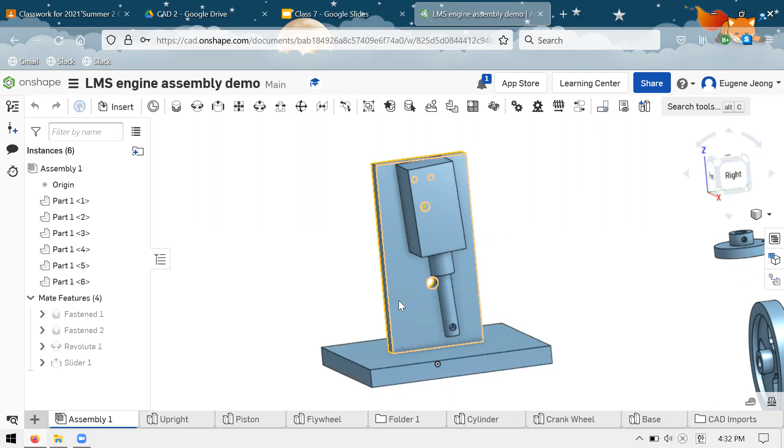What you hopefully have from last week is all 6 of these parts inserted into your assembly, and then the first 4 mates. So we fastened the base plate to the assembly origin, we fastened the upright to the base plate, we created a revolute between the cylinder and the upright, and we created a slider between this piston and the cylinder.

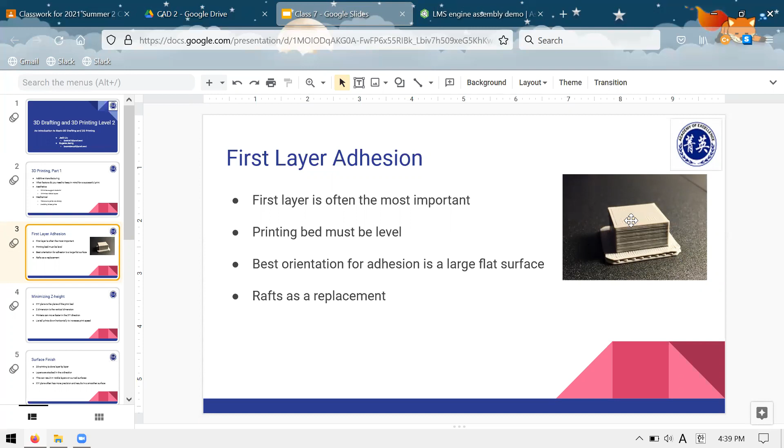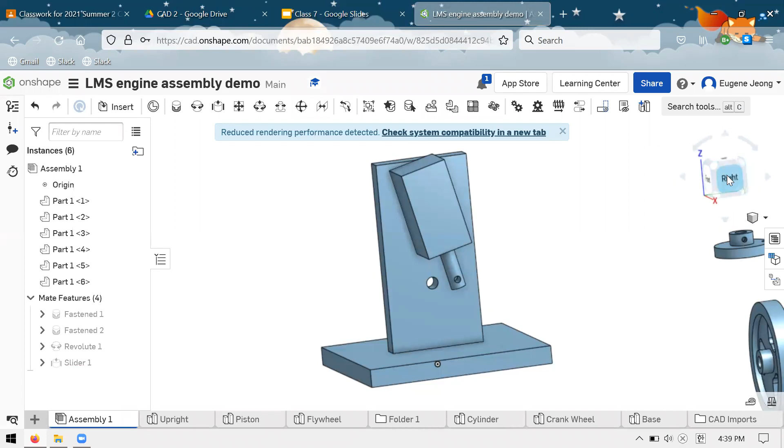Next, we have minimizing the total height of your build. When we have our coordinate system, just like in Onshape, whenever we describe a three-dimensional space, we talk about left, right, and top. So in Cartesian coordinates, that's the X, Y, and Z.

In general, not just for 3D printers but for most machines, we refer to the Z direction as up and down. A milling machine that's vertical, the Z direction would also be up and down. Although some machines have a spindle that lays horizontal, and in that case the Z axis can also be a horizontal one. But for 3D printing, usually we refer to Z as up and down, and X and Y create the horizontal plane. Usually X is left and right, Y is in and out, and Z is up and down.

It's important to minimize this Z height because printers move faster in X and Y than they do in Z. That means that if you orient your part so that a lot of the movement the printer has to do is in X and Y, then the print will finish faster, which is usually good. So you don't always have to put your part in the same orientation it will be used in. You often want to change the orientation just so that it prints faster and stronger, which is something we'll talk about.

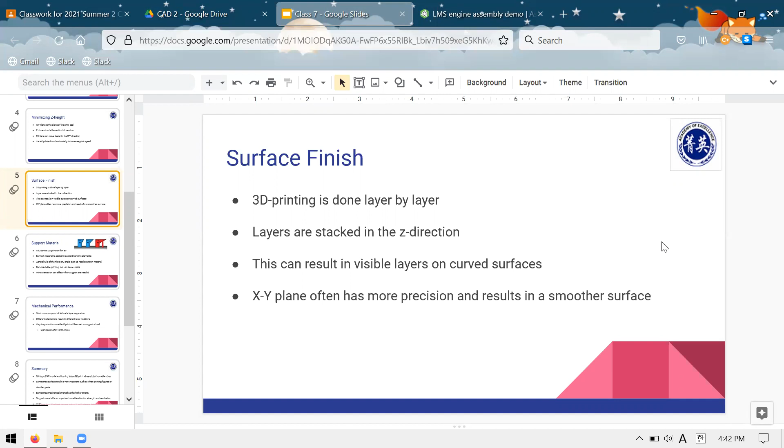Next, we have a discussion on support material. As you might imagine, if we're printing layer by layer, and you're trying to print a layer with nothing underneath it, theoretically you can't do that because there's nothing for that freshly extruded material to lie on top of. You need to have something underneath, and that's what we call support material. So when you're printing something, you might have to print parts or geometry that's not part of your actual desired final part.

And like I said before, if you have the support material, one downside is that once you remove it, you're going to have some kind of mark where it used to be connected to the part.

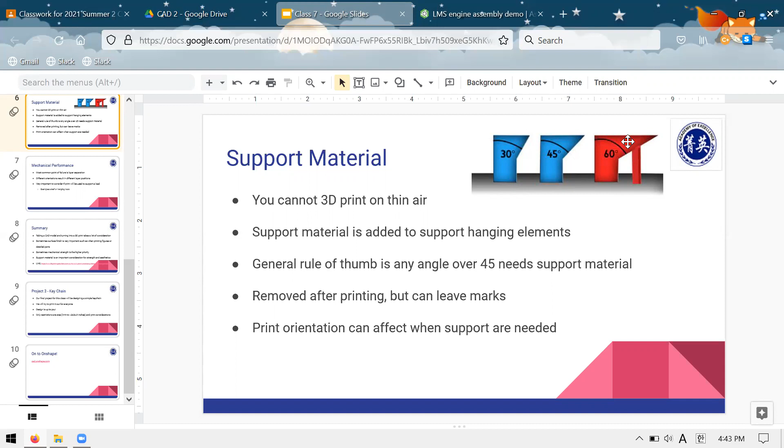Then there's mechanical performance. This refers to the effective material strength of the part you created. A lot of the time, for hobby purposes, it's going to be fine, but if you're designing a part for a more complex system, maybe for a robot team, a lot of your parts need some structural integrity—they need to withstand certain loads. So you need to consider that when you make your print.

One common type of failure is layer separation. When you have a 3D printed part, the layers all lie on top of each other. What's holding them together, if you apply a shearing force—take the top and push it sideways—is the adhesion between the layers, rather than a solid piece of isotropic, perfect material. So that's something to consider.

Again, different orientations are important. For example, if you're creating something like a long rod that needs to support something in tension—say you're going to hang a weight off a 3D printed rod—you should print such that the layers run the long way in X and Y, rather than printing a large number of circles on top of each other. This is because when you're pulling things apart, you want to be pulling these long extruded pieces of plastic rather than pulling apart the layers from each other.

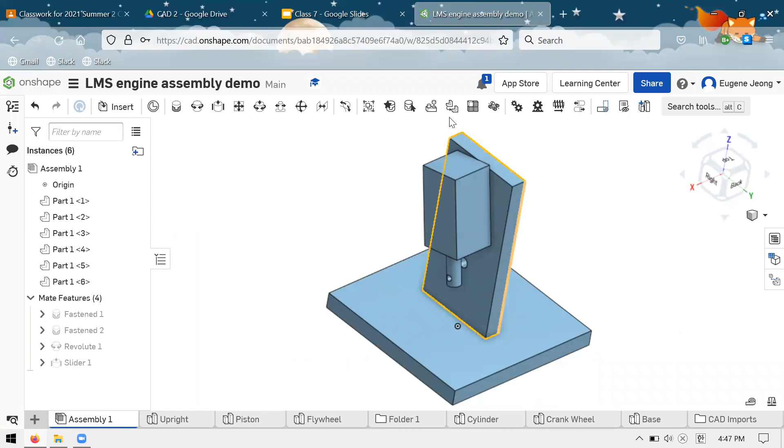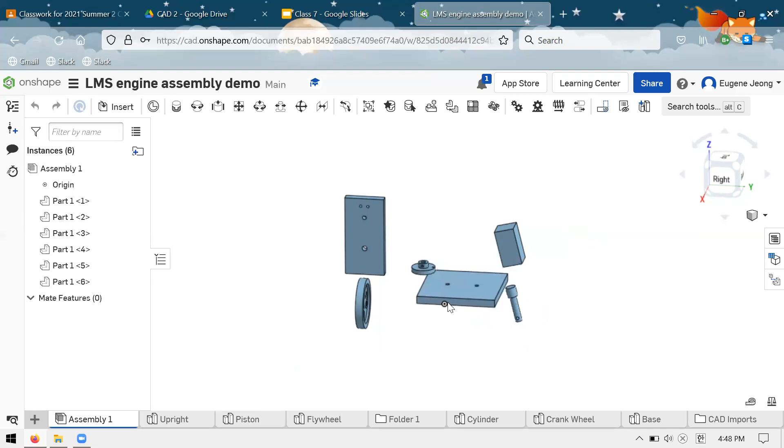As a reminder—I didn't do this, can you send me a copy? Because I didn't really do this one. It's not much, we haven't done that much yet, just make sure you've downloaded all of these from Google Classroom and you should be fine. No, I forgot, I wasn't here, can you show me again? Well, you were here last week and that's when we downloaded all the parts, so I can walk you through the mates again, that's totally fine. As long as you have the parts in your assembly, we're good. Okay, I'm gonna go there and download the file. Can you show me everything? Because I didn't do most of the parts yet. Right, like I said, even if you haven't done the parts, they're all posted on Google Classroom. Can you show me after class maybe? Because I can't get to Google Classroom for some reason.

No, I can't log in because of my school account. Can you show me after class maybe? I don't think I can help you with the Google Classroom part. No, I mean, can you show me how to make it after class?

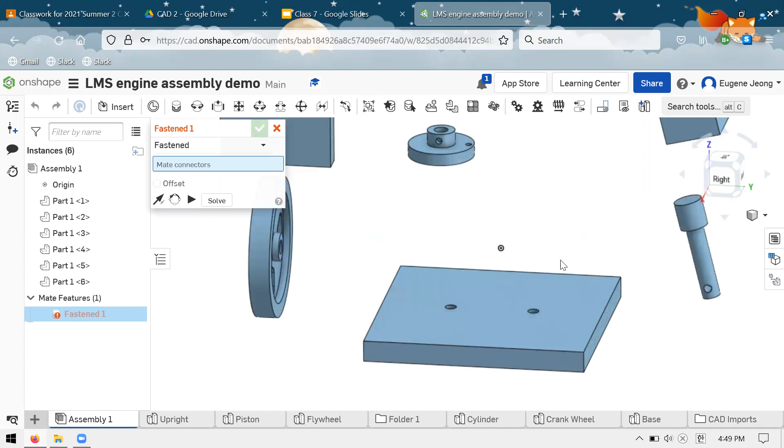For the time being, I will go over the assembly up to now, just so that all of that exists in one place, in one class. The progress hasn't been that much so far. We started with a fasten mate to position our parts with respect to the coordinate systems of the assembly itself.

Since most of you probably have seen this, I'll go through it quickly, but if you have a question, you can stop me and ask.

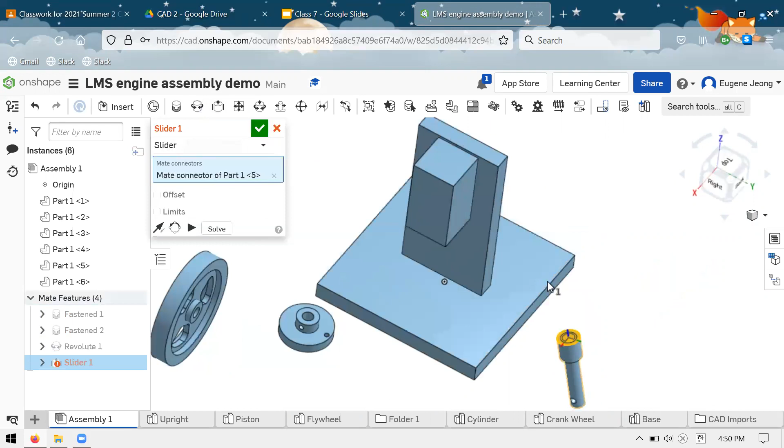All right, so this is where we were. I don't think anyone asked me any questions, so I'll assume that you're fine up to here. From here, we just have 2 parts remaining, and we will have finished this assembly.

And again, for this project, we have a reference of what this thing should look like on the original website. This is kind of what the final product is going to appear as.

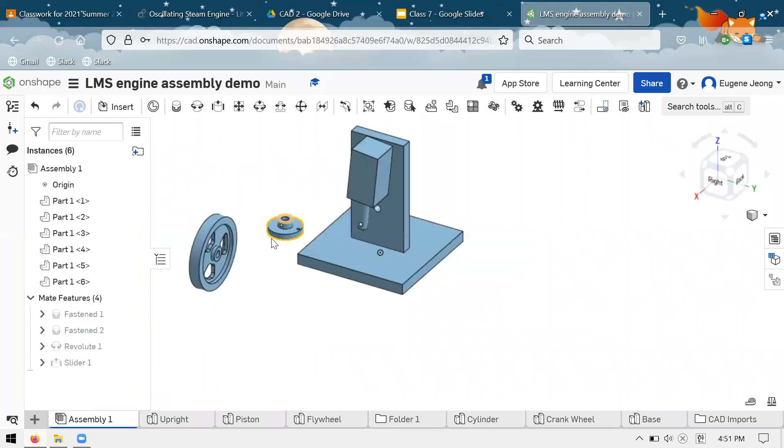So next thing I'll do is the crank wheel, that's this one right here. It attaches to the piston as well as the upright. You can see that in the final crank wheel, we have this hole here, and it will end up aligning with this hole here.

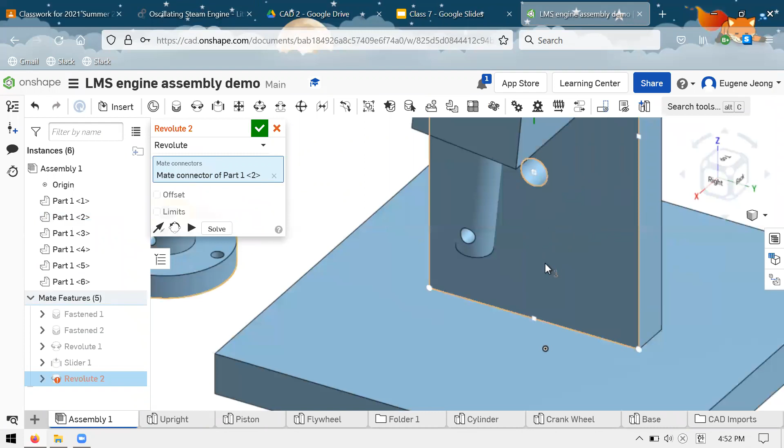So again, here we apply our revolute mate. The first step that I'll take is to put the crank wheel up against the upright so that it can spin freely there. But you'll notice that it's not yet connected to the rest of what's happening here. So first step, just make a revolute mate for this.

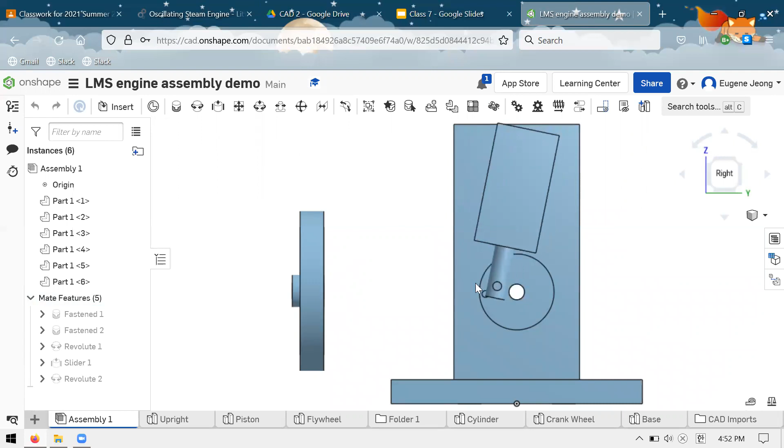And then the next step is where things might get a bit tricky, because you're going to be interfacing 2 parts like this. So we'll try it. And here there's a bit of a question about which mate that we might try to use.

When you think about what kind of behavior you want this to have, if you think about how this assembly will work with these 2 things moving together and following each other, they will actually rotate with respect to each other. So we know we probably want something like a revolute mate or a cylindrical mate.

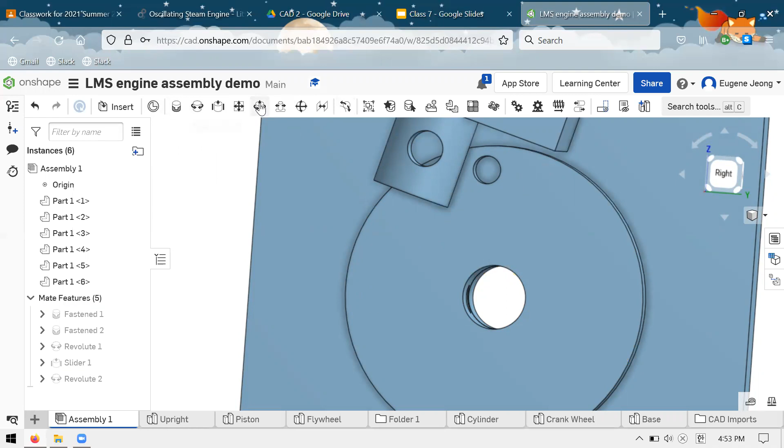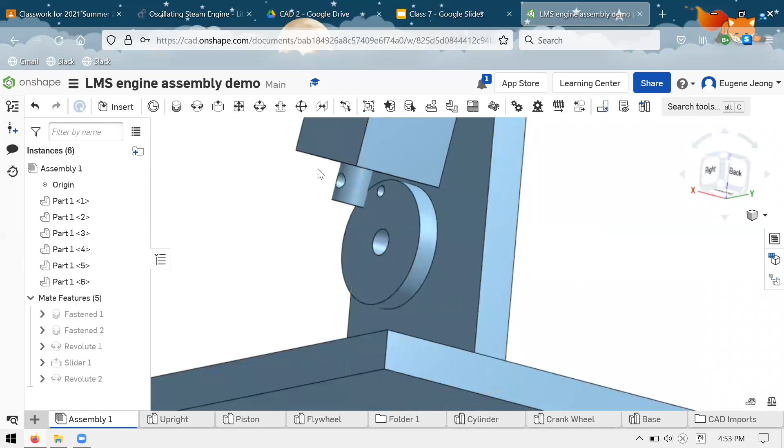In this case, I think we'll choose a cylindrical mate just because we don't know the exact distance between some part of this hole. So probably where the mate connector would end up is probably maybe the center of this hole and some part of this hole. And we don't know the actual distances there. So I'll start out by attempting with the cylindrical mate, and we'll see if that works.

Create our mate connectors, just click on the cylindrical bores. Doesn't matter too much which ones you use. Since they're cylindrical, this one, remember, has the freedom to rotate with respect to each other as well as to move axially. Hopefully, if I just solve this and accept it, then they're mated together.

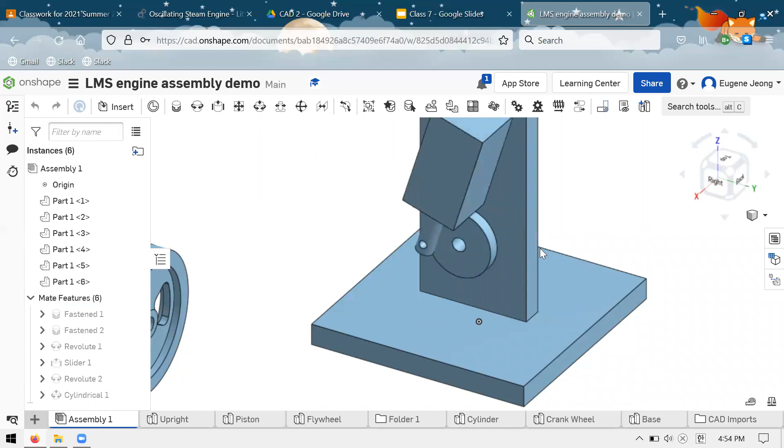And what we'll have here is, now you can see that the piston will follow the crank wheel, and we have kind of a reciprocating motion of the piston while the crank wheel is rotating. Likewise, the cylinder is rocking back and forth. So that's a bit of a tricky thing to do, but hopefully if you're careful,

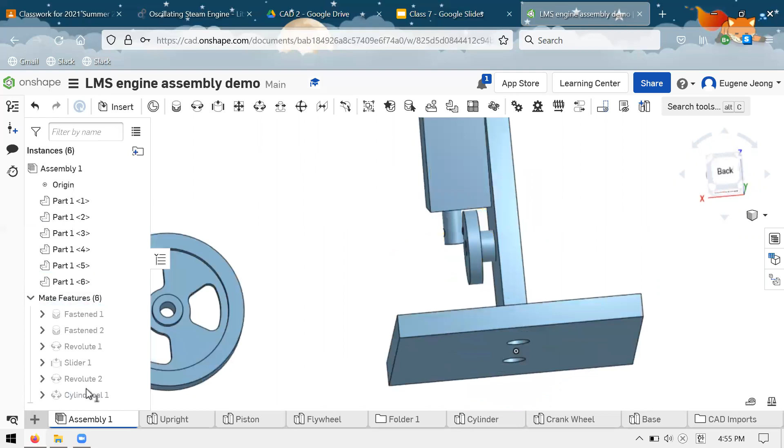you should be able to create your cylindrical mate. If you have any questions about that, feel free to ask.

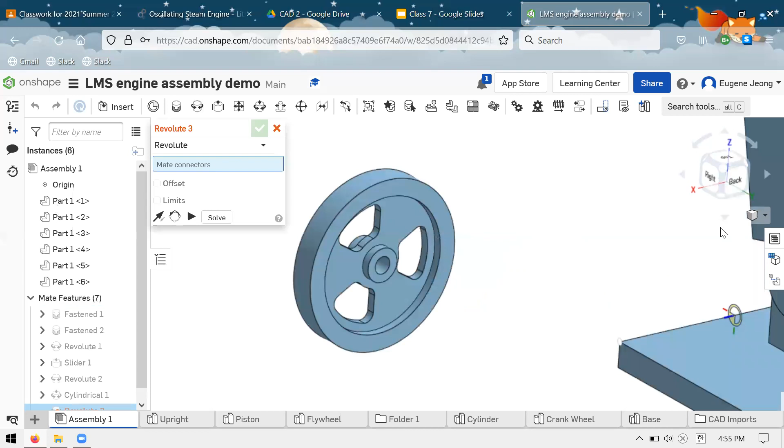All right, and so the last part we need to add is our flywheel. Here in this case, the flywheel is free to revolve on the upright. In real life, there'd be some kind of shaft and bearing.

I think actually for this part, it's just, there might be a shaft, might just be a bolt, but what we will do is place the flywheel on the upright with the revolute mate.

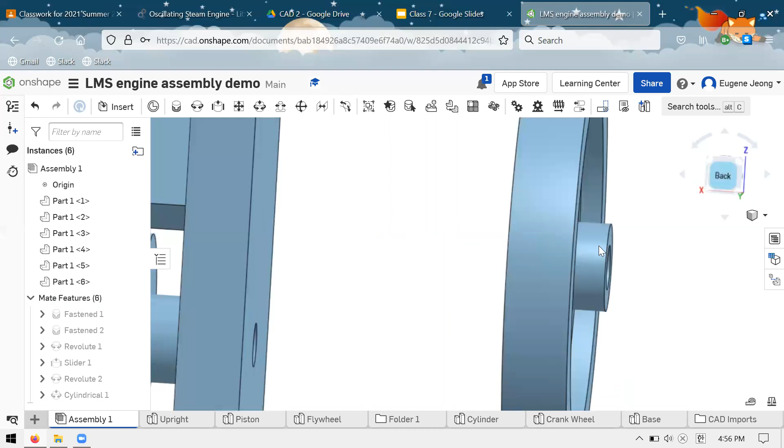And actually, I did this one backwards. If you look closely on the flywheel, you'll notice that one of the parts is farther out than the other. So if you look at it straight from the side, this one has a small boss that protrudes. So that's actually the side that you want to touch the upright. So I placed mine backwards, but now I'll fix it. Get my mate connectors.

Like such. And there we go.

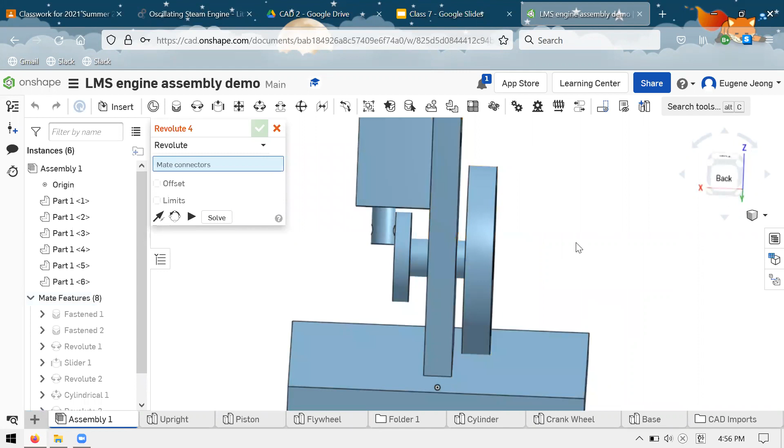Now that small boss acts as a spacer between the flywheel and the upright, so now I can freely turn the flywheel, but you'll notice that these two things are not interconnected. The motion of the crank wheel and the motion of the flywheel are not coupled in any way.

There's a few ways, ideally, I just want them to be coupled so that they rotate together, because in real life the objective of the flywheel is to store energy.

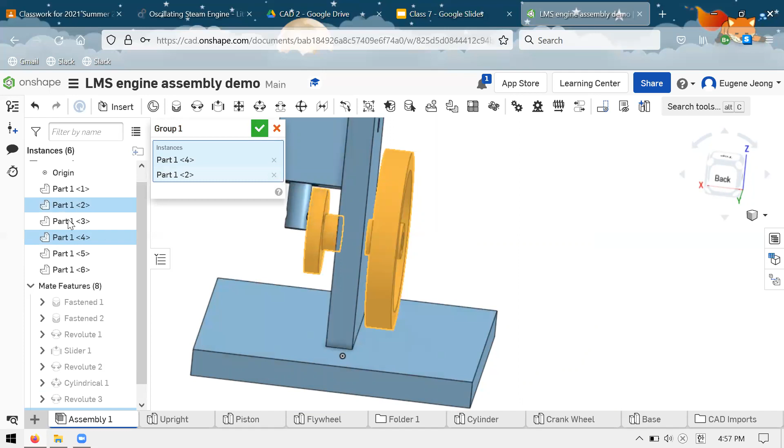So in order to achieve that, there's a couple ways I believe I can do it. One way is using this tool called group. So if I do something like that, you can see now that the flywheel and the crank wheel rotate together.

I believe also that you can do it using this gear relation mate. So two ways that you can go about this.

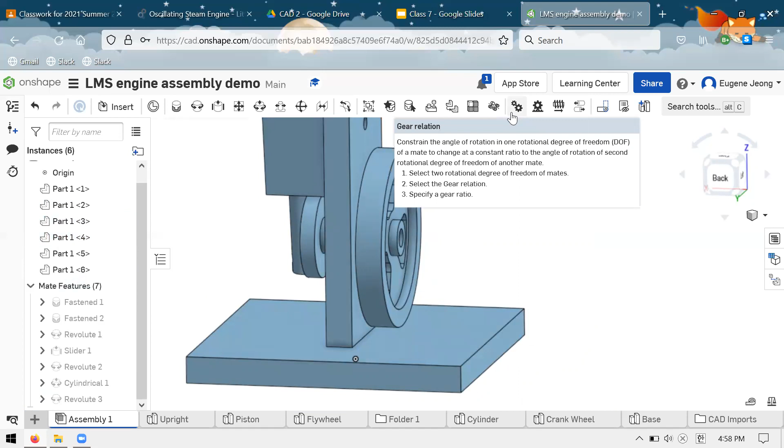I believe with the gear mate of 1-to-1, you can also make them rotate together as such. So two ways that you can go about that. One is this gear relation, the other one is using the group tool here in assemblies.

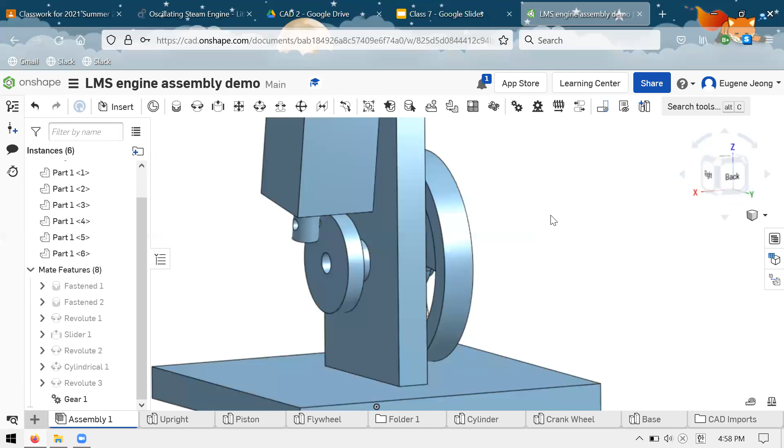For clarity, you can see here how this moves. And so that is the completed assembly.

I did go through that rather quickly, which I now realize, but if you have any questions about any part of putting this together, you can ask me and I'll go through it again. You can also play it as animation.

All right, so was everyone successfully able to complete this one? Seems pretty quiet, so if you were, congratulations. Hopefully it was straightforward enough.

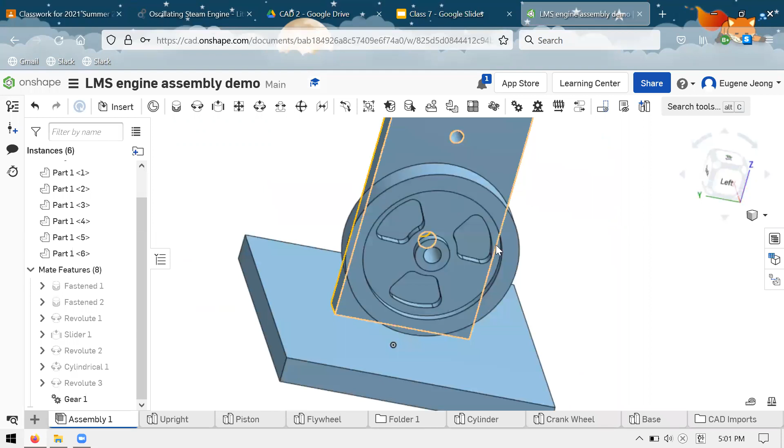So if you go to the drawings, which are also posted here, you can see that in this bill of materials it specifies, I believe, all of the hardware that you need. For example, a 632 steel machine screw nut, set screws, cap screws, washers, fittings - all of this hardware is something that if you were to make this in real life, you would put in the model, just so you can demonstrate the full assembly with all the hardware.

Excuse me, yes, but when does class end? The class ends at 5:30.

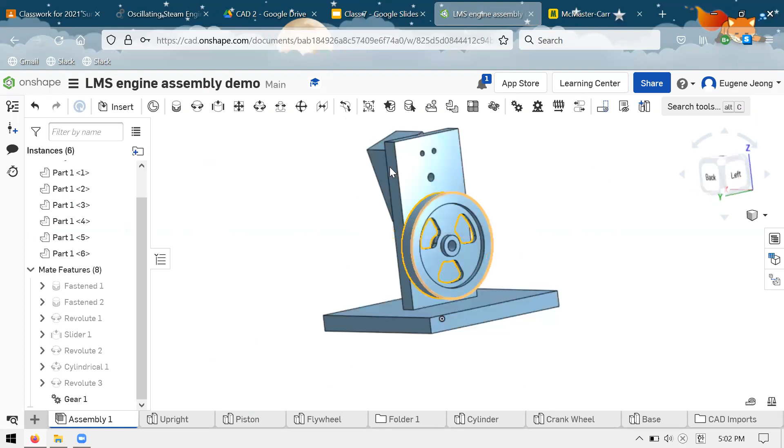Yeah, so as you might recall, as I talked about before, one place where you can get the CAD model for this kind of hardware, if you do want to include the hardware in your assembly, like the bolts, screws, fittings, and nuts, then you can download the appropriate hardware from McMaster. And I think recently, about a month ago, McMaster started to require you to log in to use the CAD models, which is a bit unfortunate in my opinion.

For example, if I wanted to get item number 11, which is this nut here, quarter 28 steel machine screw nut, I'll just go hex nuts, anyone. I need a quarter 28, this one here - oh, they made it, okay, so now we actually can download things again. So there was a temporary change, it seems.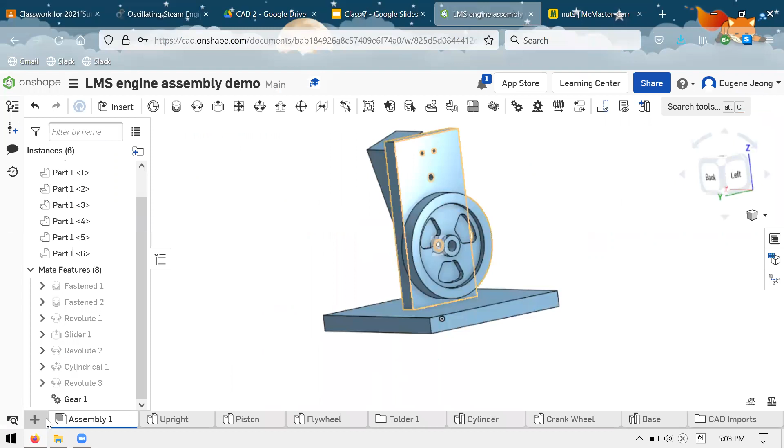So to complete my assembly, if I wanted to be very thorough, I could go find my hardware and import it.

Now you can see the nut, the specific nut that was used to fasten things here. So what was that? Item number 11. That one goes here. And I can also add this to my assembly, so insert.

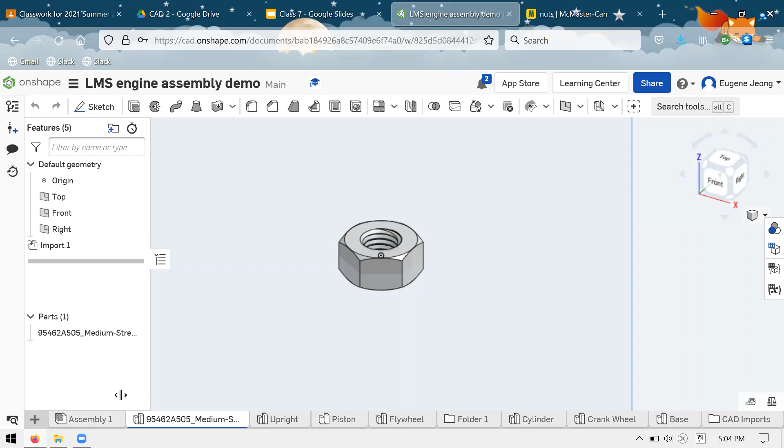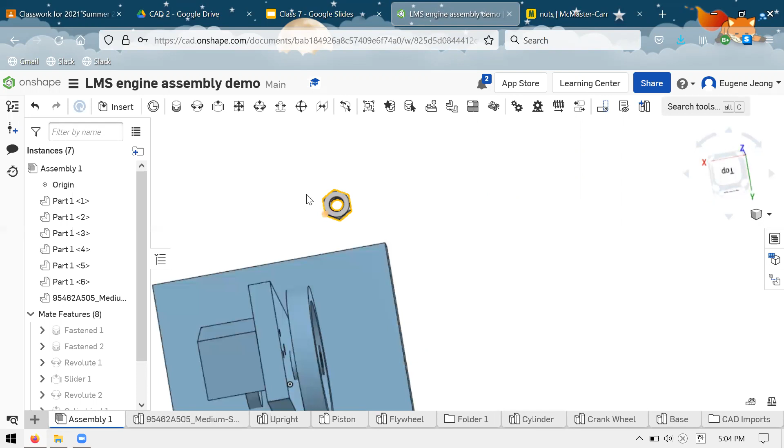What I can do is, I guess I'm not going to demonstrate putting in all of the hardware - if you did put in all the hardware, you'd probably do this a bit differently - but what I can do is place the nut where it belongs. So you can imagine if I repeated this for all of the additional hardware that's in this assembly bill of materials, that I would have a slightly more accurate and realistic model where you can actually see the relationship between these, where these holes are placed and what allows them to move on each other.

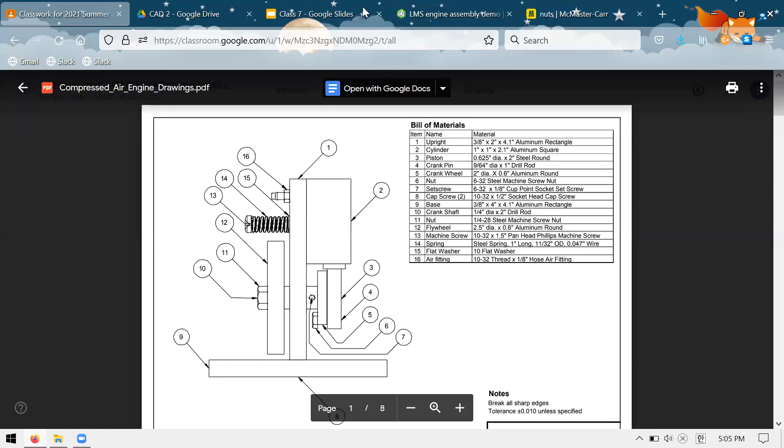But for the time being, this is a completely functional model. I may have put this bolt in the wrong place or this nut in the wrong place - let me see. Oh, it goes on the flywheel, my bad. So, yeah, on this side, I can do something like this.

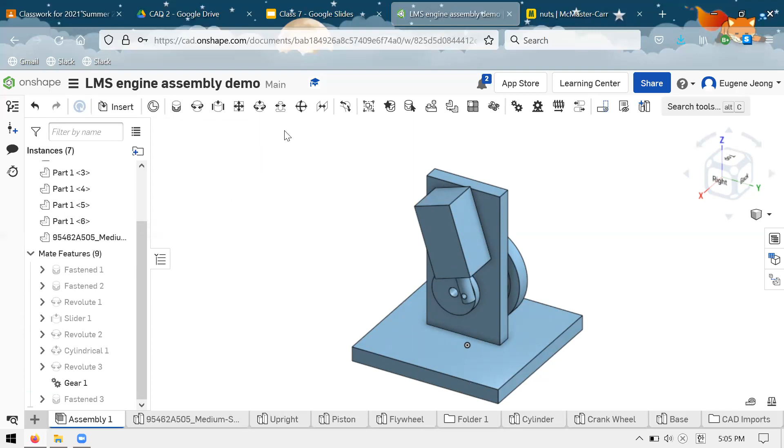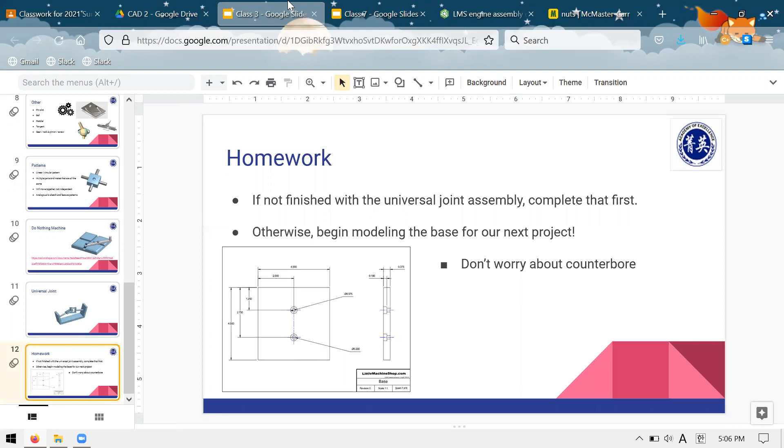All right, so if there are no questions about this project, then we've now officially finished the air engine project. Congratulations. The main outcome of what you've gained from doing this is you've modeled a number of parts by looking at the drawing. For every single part, during the corresponding class, you had to learn how to read and create a model from the drawings. Every week we worked our way up from a relatively simple part to a more complex part like the flywheel. After that we did an assembly, which is more complicated, with different kinds of motion, relations between the flywheel and the crank wheel, or parts with more than one mate on them. So hopefully that was helpful to you.

Okay, so now this is the second to last week of the class. Next week is our last class. This week we'll be starting our third project, which is designing a keychain. I'm not sure if this one is true for this session since I'm not related to the actual AOE center, so you can ask Missy about it if you're curious, but the idea is to design a simple keychain or a keychain attachment.

On your keychain, you might put something decorative that helps you hold on to your keys. The only restriction we'll place on this project is that you limit the bounding box to 3 by 3 inches by half an inch. The reason for that is firstly that anything larger would probably be an inconvenient keychain, and second, if it's possible for you to receive these 3D printed, that is the size they want you to have.

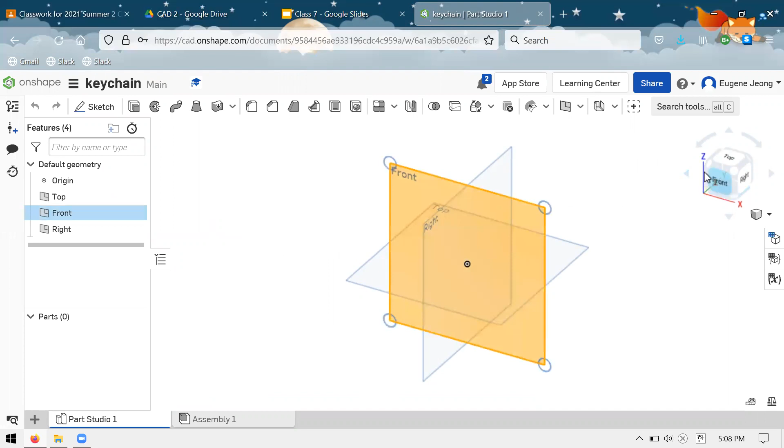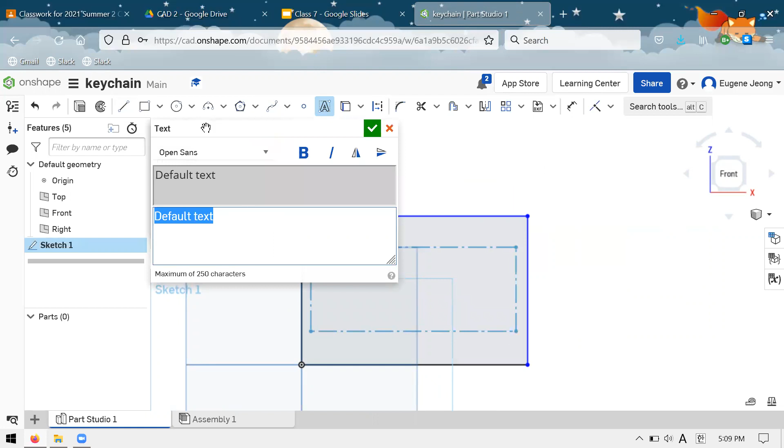To start out with, this project is a bit of a different flavor than the Air Engine project we've been doing up to now. The Air Engine was more of a technical engineering type of CAD project where everything needed to be accurate, a certain size, with a certain position of all these holes and features. On the other hand, a keychain is pretty non-functional, almost completely decorative. So the design of the part is very much a matter of your own preferences. For example, one classic idea is perhaps a keychain with your name on it.

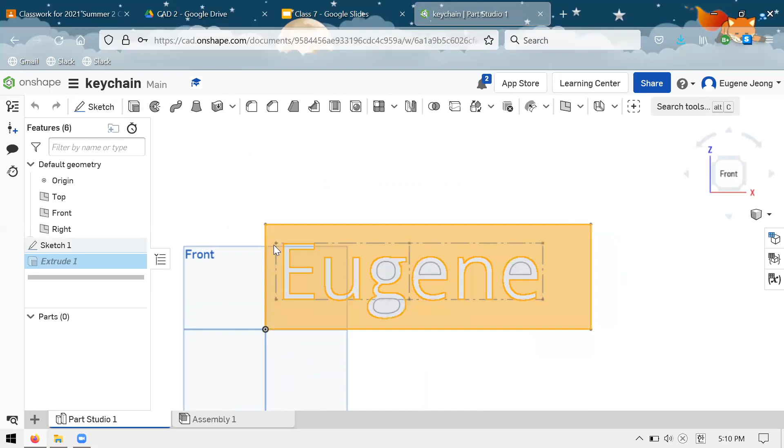In the sketch features, you may have noticed this before: the text tool. This allows you to create text in a number of pre-specified fonts from Onshape as a sketch feature. So if you want to write words, there's no need to try to recreate a font using lines, arcs, and splines. What you can do is use the text tool, drag out a box, and then spell out something like that. And if I extrude this, this is what I get.

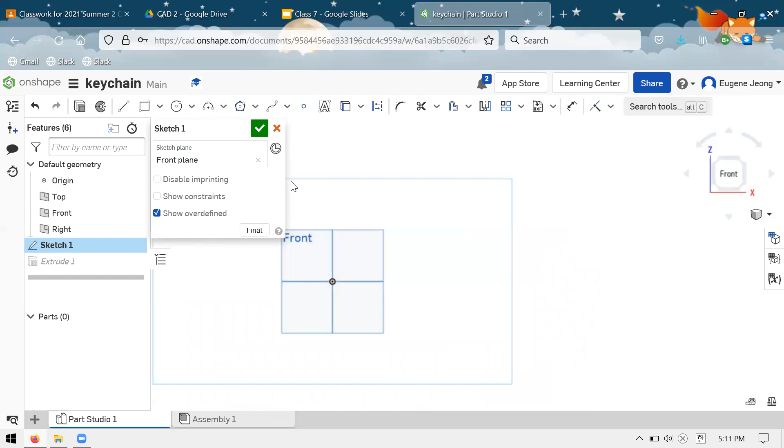If you need to control the size of the text, you need to limit the size of the height of the box you draw using the text tool. For example, let's say this isn't the actual size of your keychain, but I'm working with a block that's 3 by 6 inches long. If I want to write my name here, I need to make sure my text box doesn't exceed this, but also that I have enough length for the entire word to fit. A short word can probably fit here, but you can see this word is actually too long. So to fit the entire word, I might need to make it a bit smaller when I first draw it. And you can see now that it fits.

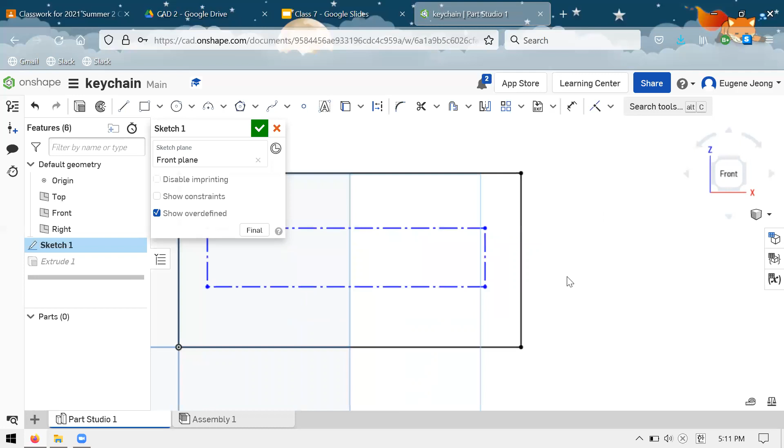Unfortunately, with Onshape, I believe it doesn't allow you to rescale the letters once they're in position. I wonder if I can, actually. Okay, you can do this actually. So you can control the size of your letters just by dimensioning this box.

And otherwise, you can work with it like any other sketch feature, like a line or anything else.

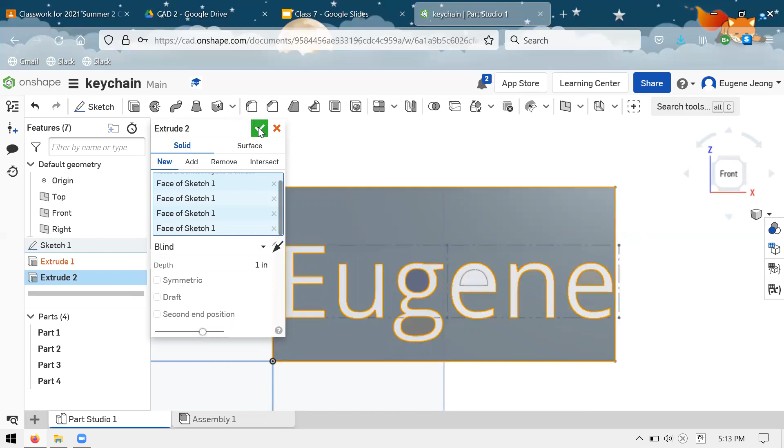Another thing you should note when you use letters is that a lot of the time you can't create a solid object that is cut entirely with the letters. So for example, if I want my name to appear properly, like this, what I actually get is a number of different parts. You can see that when I created this extrusion, it actually created 4 different parts. We have this part here, this one here, this one here, and this one here. And underneath my feature tree, I can see that I actually created these 4 different parts.

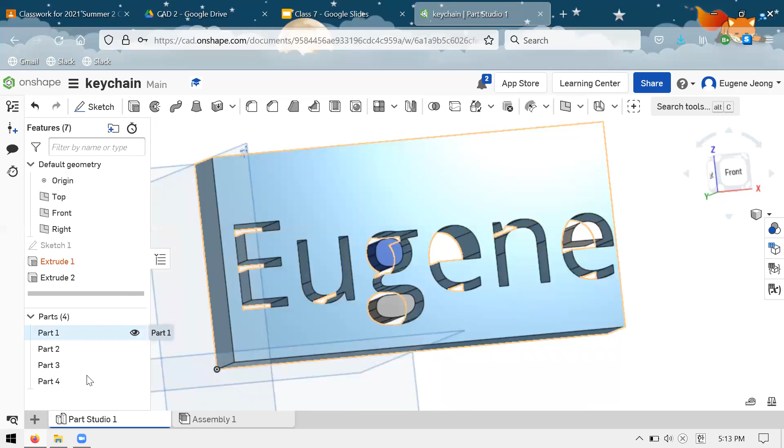So when you're creating a part in real life, you can't actually do this. If you try to 3D print this, you'll just be left with this piece, then also this piece, and also this piece, and also this piece, which is not really what you intended.

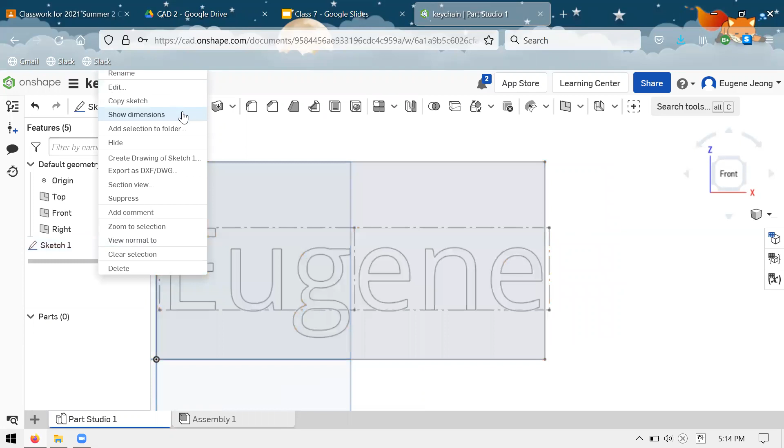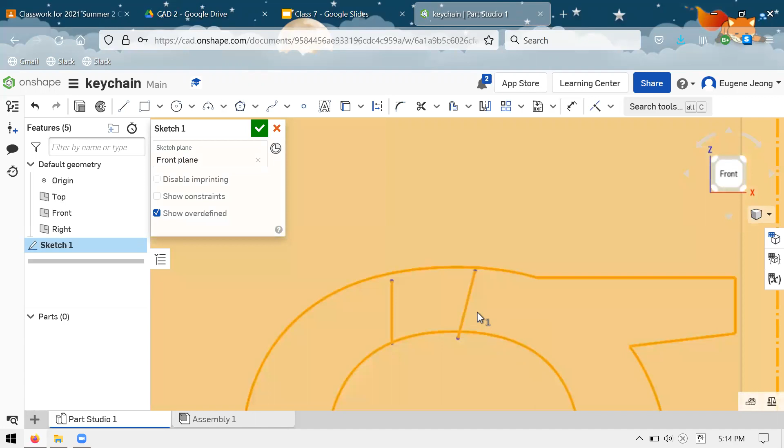So if you want to create something like a block with a word on it, and the word has letters like G or E that have holes inside of them, what you will need to do is to slightly modify the letters. For example, for this G, I can add... I'm not sure if this works, but... oh, whoops. Okay.

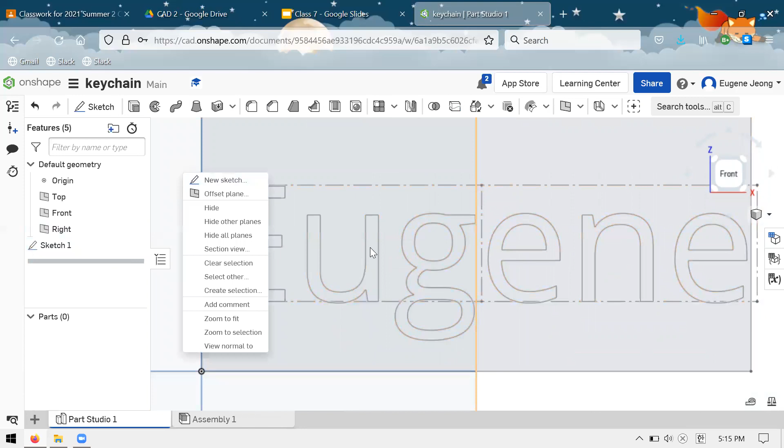So you may need to modify the letters in any case so that they have a connection between the parts here. You can also do it after you create your first extrusion. For example, I can do something like this, and then I can extrude another shape that connects from here to here. And then I can extrude this shape in the middle, and that will connect the blocks together.

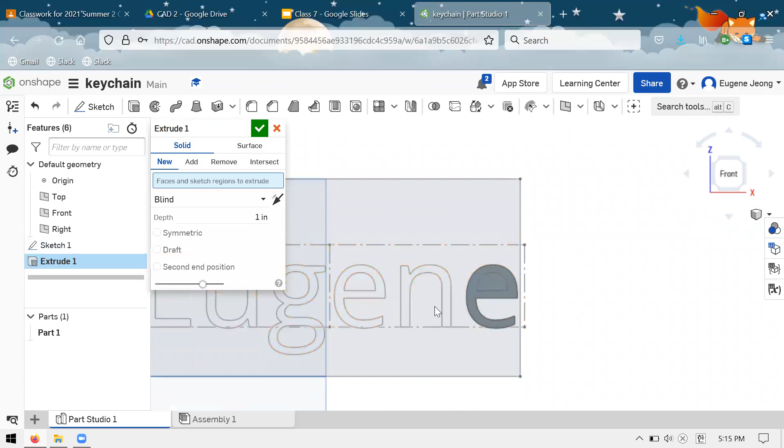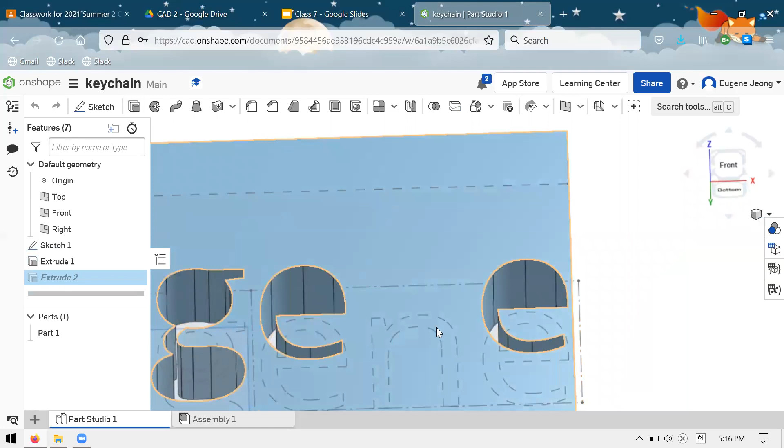But another way you can get around this without doing that is to not cut the letters all the way through the block. So if you have your letters, I'll just demonstrate with the N. And what you can then have is kind of a shallow cut like this.

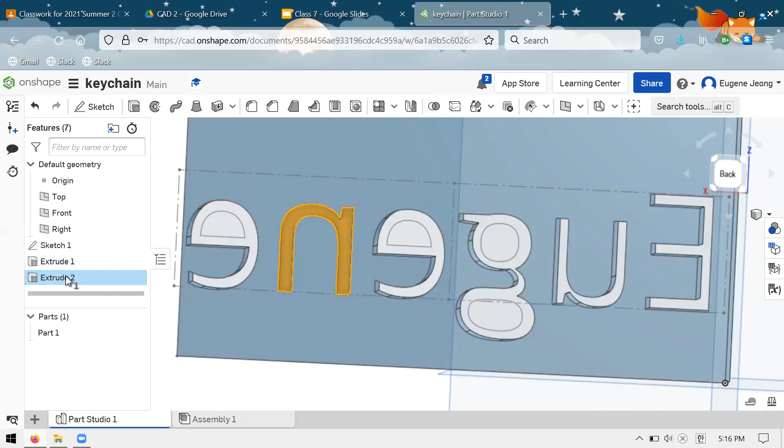So that is one thing that you can do if you want to have text in your design. Another thing that's popular is to kind of create your own shapes using this tool, which is called spline.

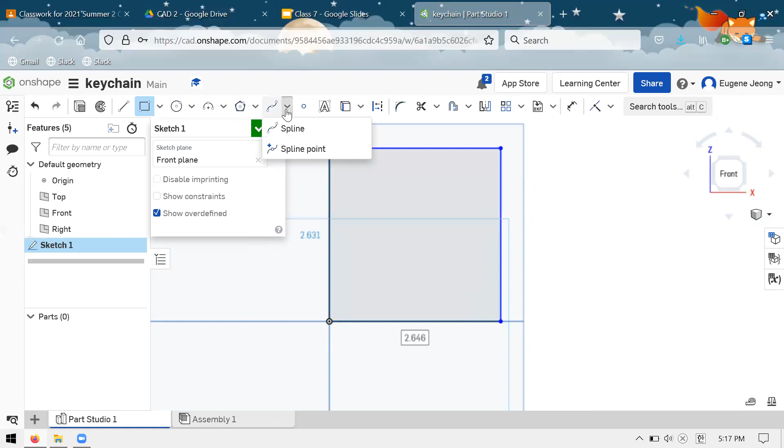So spline is kind of a curve, but it's not necessarily a circular curve. You can have multiple different radii of curvature. The simplest spline just has two endpoints and these two things which are called spline guides, or spline... I'm not sure what they're called actually, but what they allow you to do is you can drag them and they indicate the tangent direction at the point where the spline ends. So here you can see I can create some curves which are not circular with the adjustment of these two spline guides.

So in order to fully constrain a spline, you need to fully define 4 points: the endpoints and the two guide position points. You'll see I can specify dimensions like this. For a point, all you need to specify is its position and it will be fully constrained. So at most, you'll need 8 different dimensions in order to fully dimension a spline.

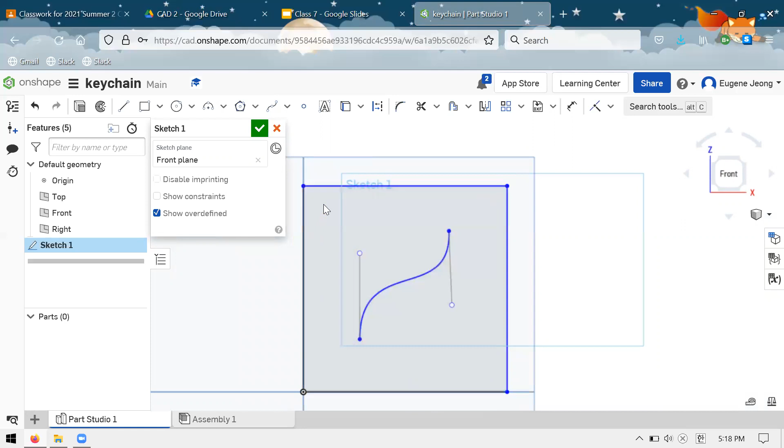And so you can imagine for that reason that splines are kind of a bit complicated. A lot of the time we don't use these to design mechanical things, but it's often okay to use if you're just trying to create a certain shape.

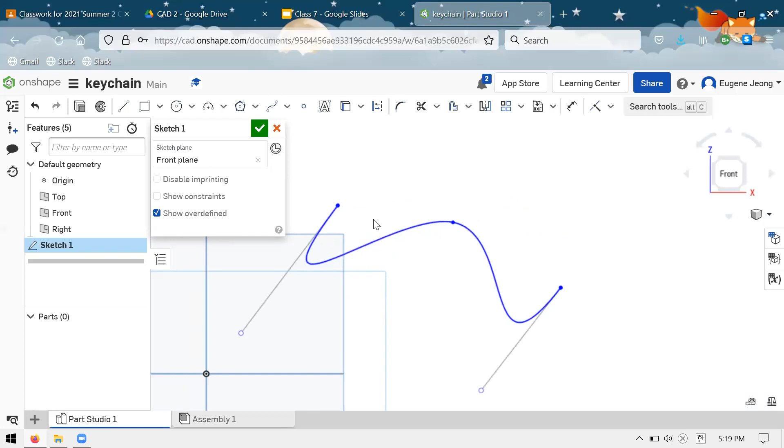Another key thing is that you can use more than one spline point in a single spline. So this one is a 3-point spline. Now I have this intermediate point, which I can control, and I also have these guides that I can control. So as I increase the number of spline points, the actual geometry I can achieve becomes a lot more complex. I can do some interesting things that I can't do with only 2 points, but I need this 3rd point to do it.

And likewise, I can do this as many times as I want. I can have as complicated a spline as I want to create any kind of shape, kind of like I'm drawing a shape with a pen. But I will warn you that the more spline points you have, you should consider that most of the time you don't need this many. You can achieve a lot with just lines and circular arcs, so don't feel the need to use these splines unnecessarily, but it is a tool that exists and can help you create a design if you want some kind of fluid shape that you can't easily express with just lines and arcs.

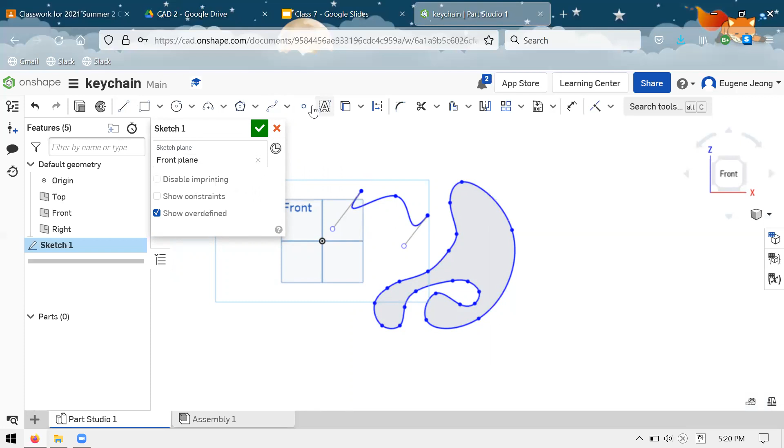Some other things to think about as you work on this project: there are limitations with what 3D printers can do, and one of those is the minimum thickness of a part.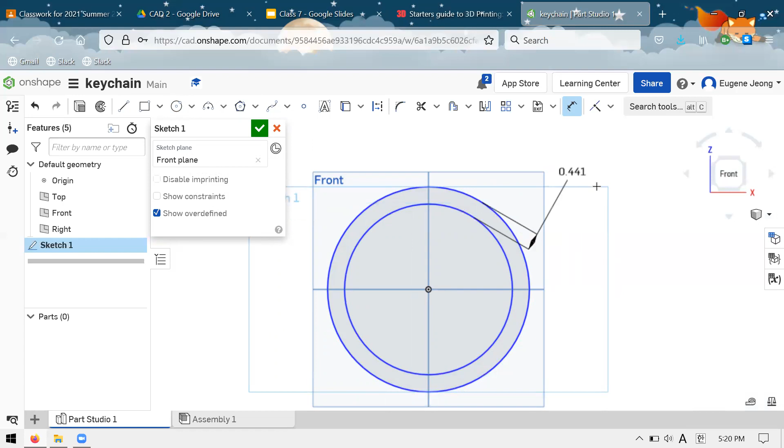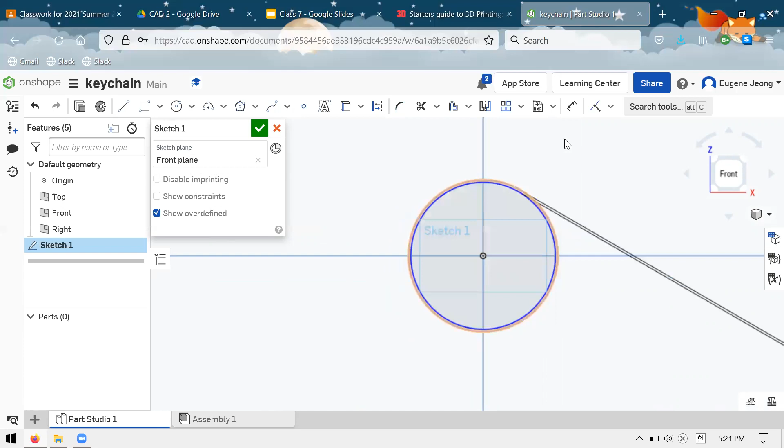If I design something, let's say a circle and another circle, trying to create a ring shape, the problem is if I design this to be too small, it might not be possible for my 3D printer to actually create it because the wall is too thin. Either I'll attempt to print it and it'll be too thin and weak and break, or it'll be so thin that it's not physically possible for the nozzle of the printing head to create this kind of thin wall. So this might not necessarily be a printable shape.

So there's a few rules of thumb. In general, for whichever 3D printer you're using, if you have access to one, you probably know what it's called, so you can search the specifications for your 3D printer. If you ever have questions about what you can or can't do with a 3D printer, you can generally look it up. 3D printing has been around for a long time and is accessible to hobbyists, so many resources are present which you can rely on.

I think maybe something like 1 millimeter, or 1 to 2 millimeters, is probably a safe bet for the minimum sized feature that you can safely create. This one is a bit of a contrived example.

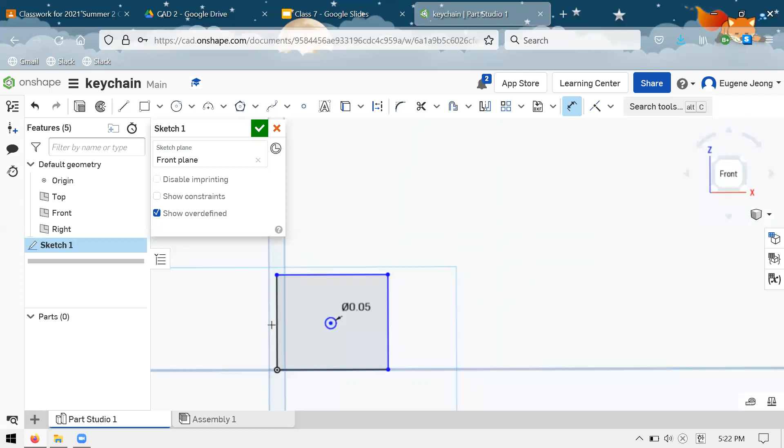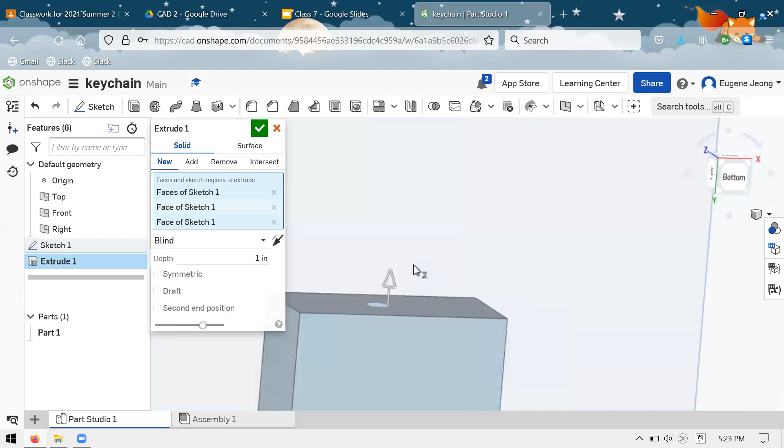You can also imagine, let's say I'm trying to create something and make a shape like this. Well, this example is not the best, but you can imagine if I have a really thin pin or a really thin wall that exists, in those cases you might not be able to print these things.

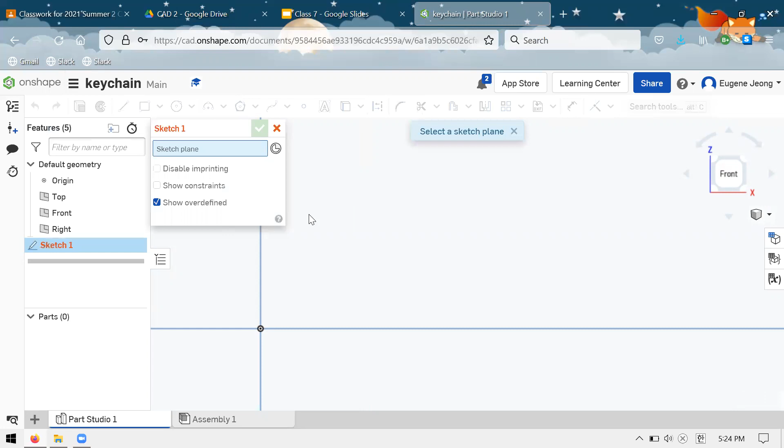Other things to watch out for: as you design things, you'll quickly learn that you actually design a lot of really thin or small geometries without even realizing it. For example, a lot of keychains will have a hole for the chain link to go into. So you might design something like a rectangle, and then at the end of it, have something like this.

When you do these things, just make sure, for example here, that this wall is thick enough between here and here.

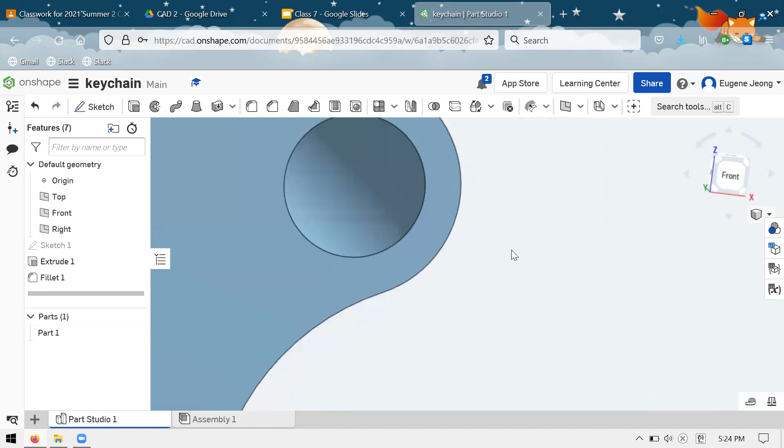Can you show me the sketch? I wasn't finished with the sketch when you came here. For this one? Can you show me the sketch again? Okay, that was a really fast and dirty sketch, but basically you have two circles.

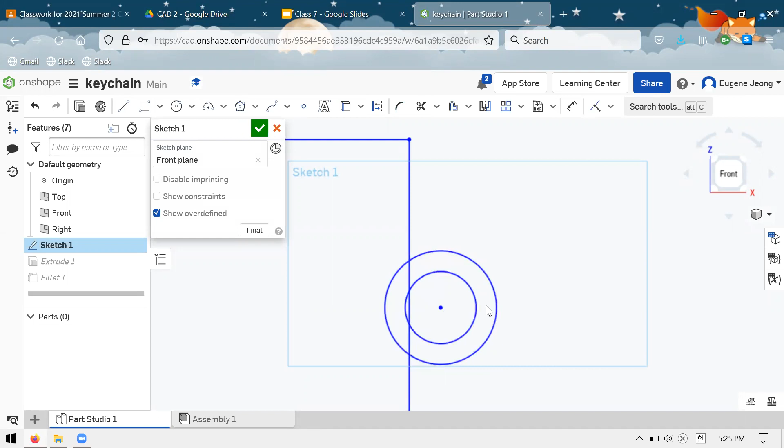You kind of just position this somewhere and you can extrude them. So how did I do it, like I can't move it, how do you move it? Whenever you have a question like that, the best thing to do is delete it and start over, because you probably created some kind of constraint automatically, like Onshape guessed you needed this constraint when you really didn't, and that messed you up later on. So if you're having a problem that seems simple, like needing to move something but it's stuck, it's usually just extra constraints that shouldn't be there. If you delete it and retry, it should probably work. I'm gonna try again. Yeah, that's a good idea.

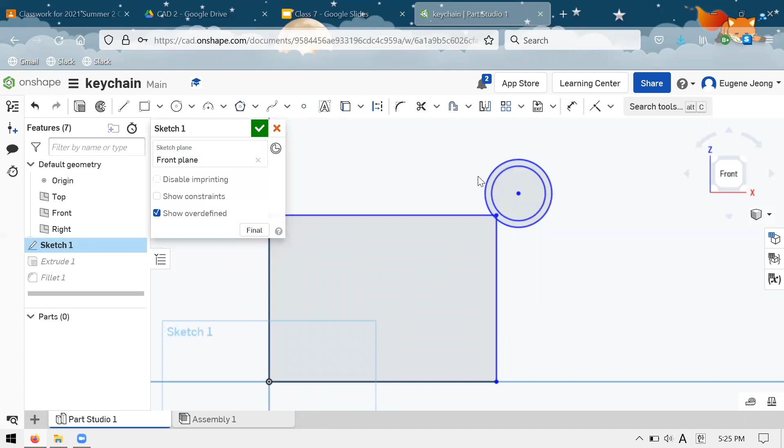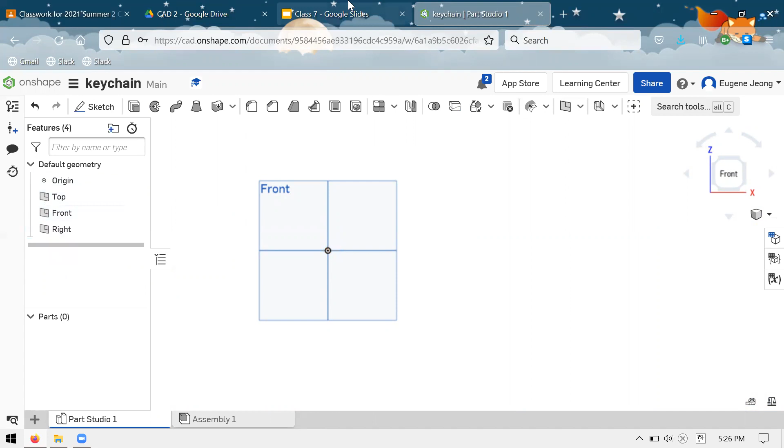Next week, I'll talk a bit more about other considerations that exist in terms of 3D printing, and I'll probably do a demonstration of how you can take any kind of image or picture and recreate that in CAD by tracing over the image with splines. It's a fun technique, not that useful, but it's a cool way to get a shape into your model without too much effort.

I see there's a question about CAD 3. That is a class that exists and I have taught it, but I'm not really sure when or if that will be offered, just because I'm probably the one who has to teach it, but I don't think I will. If it is offered, you'll know, but it might not happen, at least very soon.